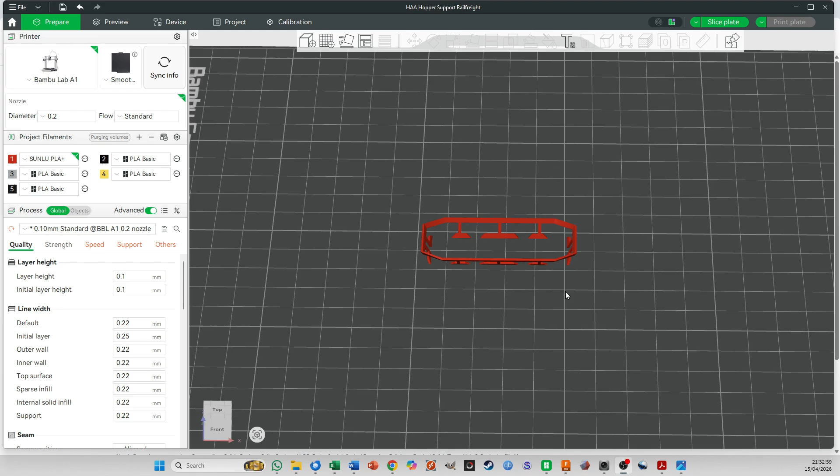Okay folks, this is a short video on how to get this support for the HAA wagon to print properly. I'm assuming you've loaded up the model in Fusion, exported this support as an STL for 3D printing, and now I've just pulled it into Bambu Studio.

So here we can see it in Bambu Studio as you'd see yourself. If we look here across on the left, on the speed, I've reduced a lot of the speeds by half, which makes it more reliable for fine printing.

If we go across to support, I've set the support to enable supports and chosen the option tree manual. That's the key thing on this, because the auto ones, since it's quite fine, tend to be very difficult to remove. So we're going to do some manual trees, and the style we're going for is tree slim, quite fine ones.

Okay, and then if we go into others, on bed adhesion, Brim type painted, and we'll come to that in a minute. So that's the settings. I've got this set up at 0.1.

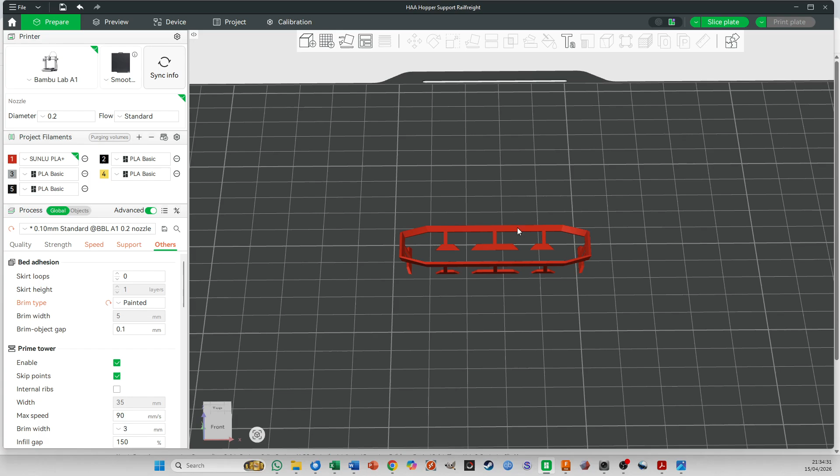You can probably run it at 0.06, but let's really talk about the supports here. So first thing we do, click on the model to highlight it, and then you get more options up the top here.

And the first one is we're going to go for Brim ears. Some of you may have used this, some may not. We're going to go for head diameter 5 millimeters. So let's have a look at that.

What we're going to do, rather than auto generate, is I'm going to paint these on myself manually. If we hover over these, it doesn't show unless you're where the model touches the bed. So I'm going to put one there, one there, one there.

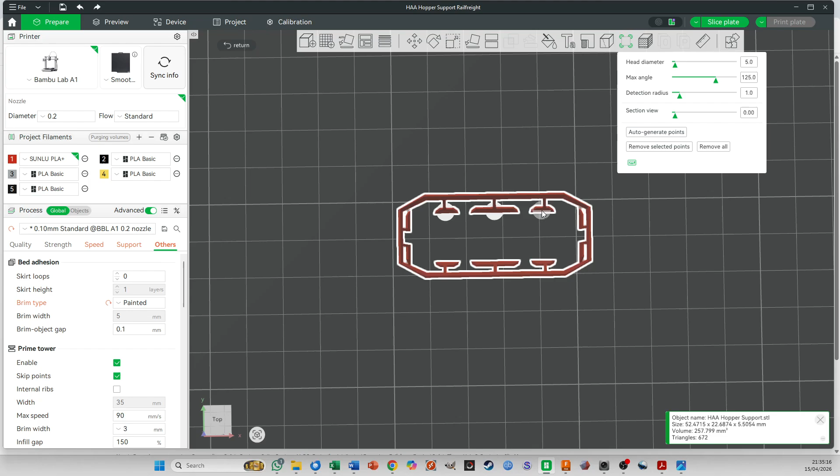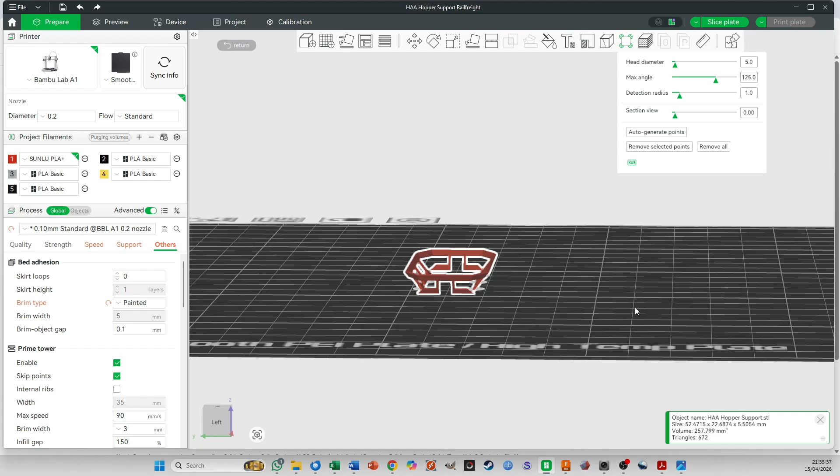What this does is when it prints, it puts a one layer thick circle before it starts printing the model itself, and that gives us much better adhesion for these very fine bits, which are actually at an angle. If you look at the side, they're at an angle, and they'll tend to break off, fly off, or whatever, unless you put those on.

Okay, so that's the ears we've put on to help in terms of support. The next thing we're going to do is paint on our own supports. So I've clicked on this painted one, and it chooses a pen size.

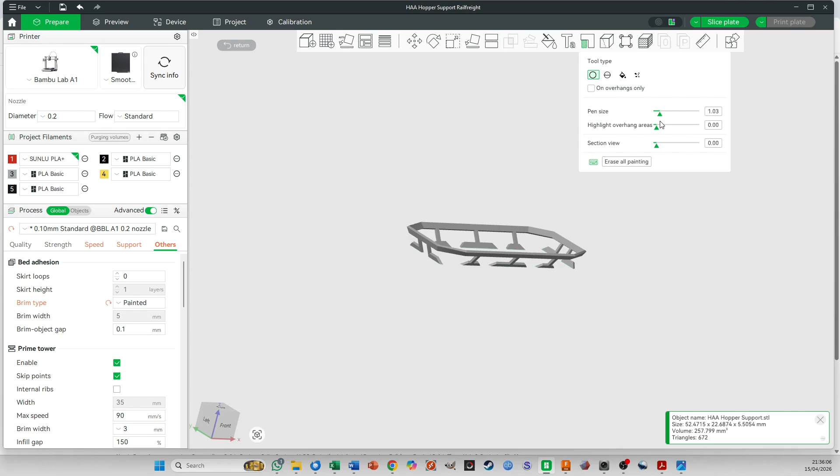I'm going to go for quite a small pen size. I think I'll run it with, let's try 1. We'll see what it looks like. Yeah, maybe a bit smaller than that. 0.4 is the smallest. Maybe a bit bigger than that. I can't remember. Actually, if I go in here and type 0.7, I think that's what it was.

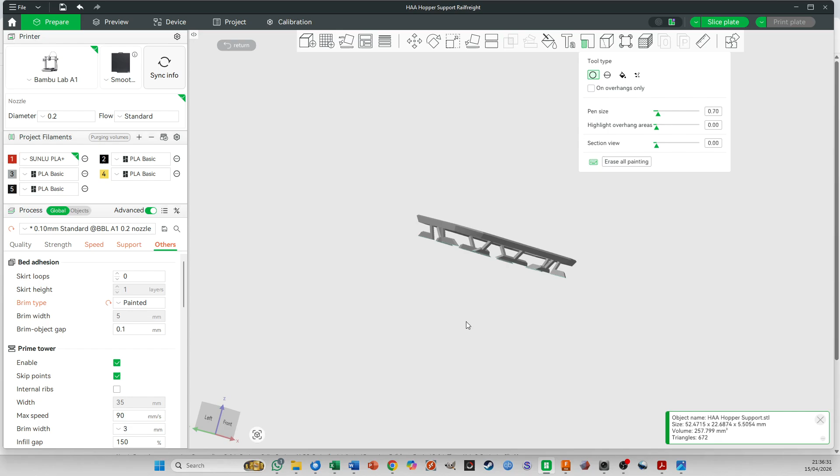Okay, and here this is supports, because we've got big overhangs here. So the printer's going to try going around. You can't even think of possibly going around a corner—it's just going to droop the plastic.

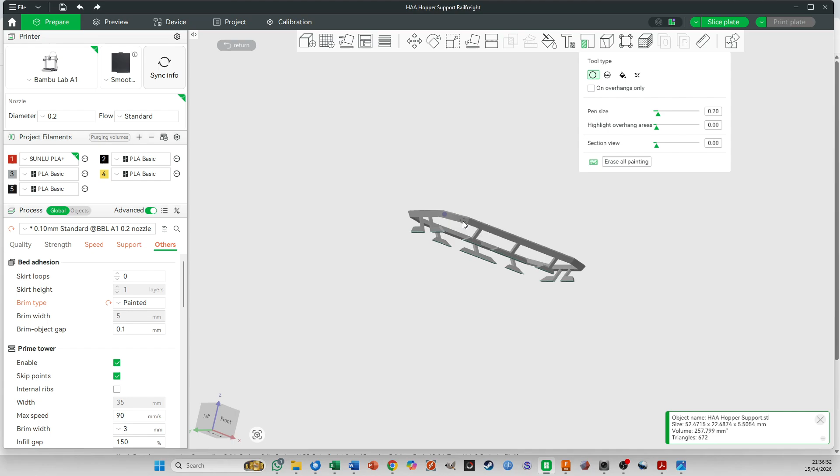So if we put a support in there near that corner but not on it, there near that corner but not on it, halfway between these two, halfway between those two, again not on it, not on it, go around the other side, do the same thing, just mirror on this side. It'd be quite nice if we had a mirror option, but it doesn't.

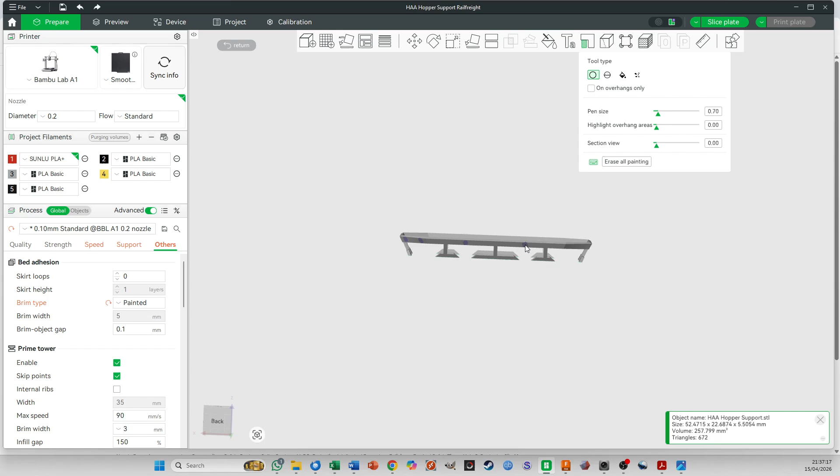These don't have to be too critical, and we'll see what happens when we slice this. Okay, going round, round, round. Okay, that all looks good. So if you click on that icon again, that turns it off, or at least hides it.

And then if we then slice the plate, you can see here it's now put supports in where I've told it to put supports in.

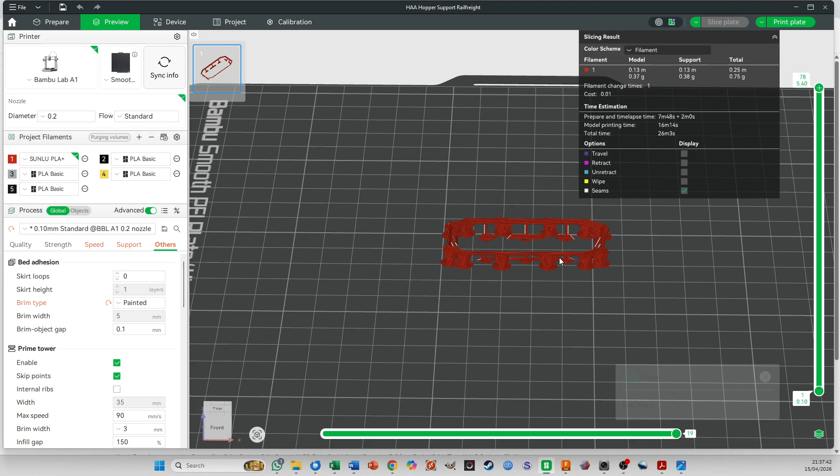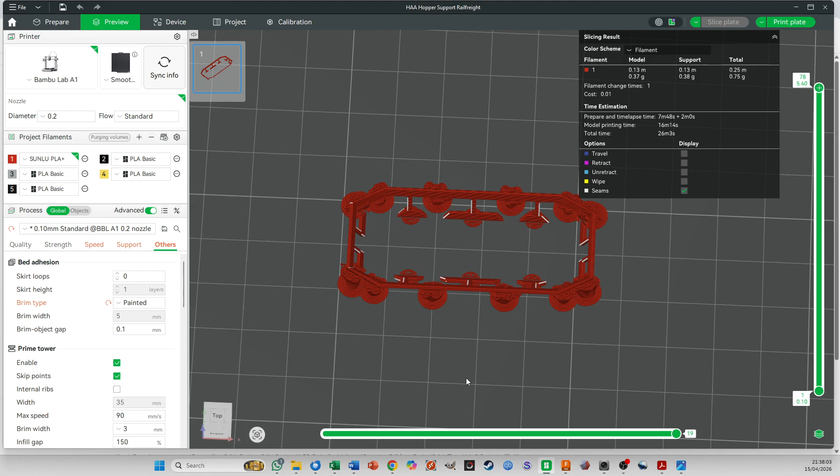That might be useful for you guys that run some of the Cults models or something like that, which have got big overhangs, where some of the automatically generated supports are rather over the top. Here you can choose where they appear, so it's much better. Rather than using the AI or computer generated supports, you're choosing where to put them, and that then will print well.

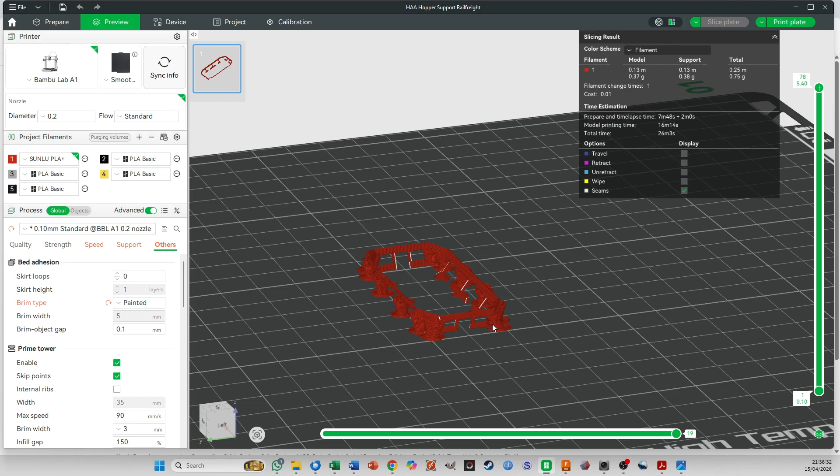These middle ones will fall off quite easily. These end ones are critical. This one comes off easily, but this one spreads into this foot here. So when you take it off the print bed, you have to be very careful taking it off in the first place, but also you have to trim off the end here. Otherwise, it tends to rip this leg off. But that's the way I found best to print the supports, and they come out really nicely if you do that.